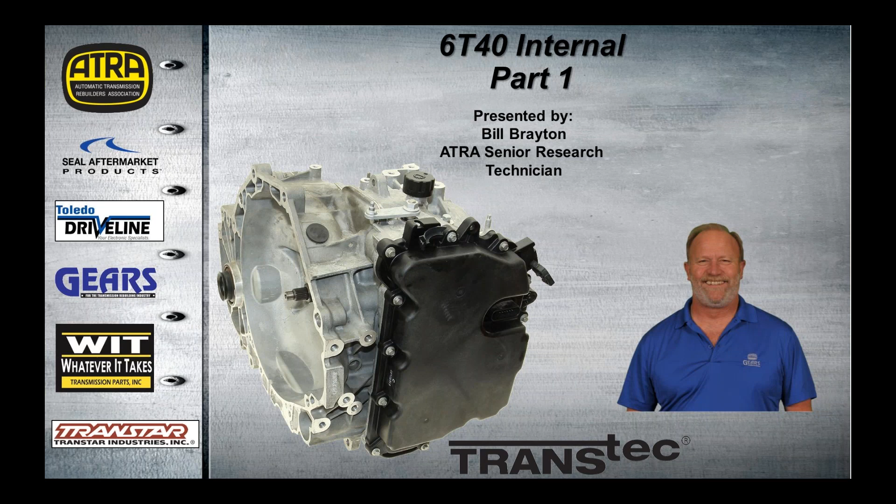I'm the ATRA Senior Research Technician, your host today for our 6T40 internal, part one of a two-part series. I started this webinar to be a full-on internal, take me apart, put me back together type of session, and that was going to be too long, so we had to split it into two parts.

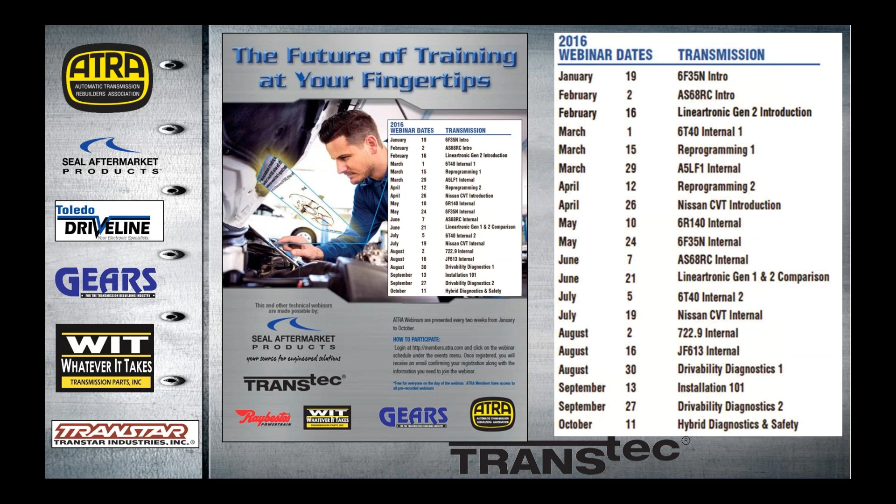July 5th is going to be part 2 of this two-part series, where we'll cover assembly and common failures for you guys to look out for. Lots of opportunities to get trained.

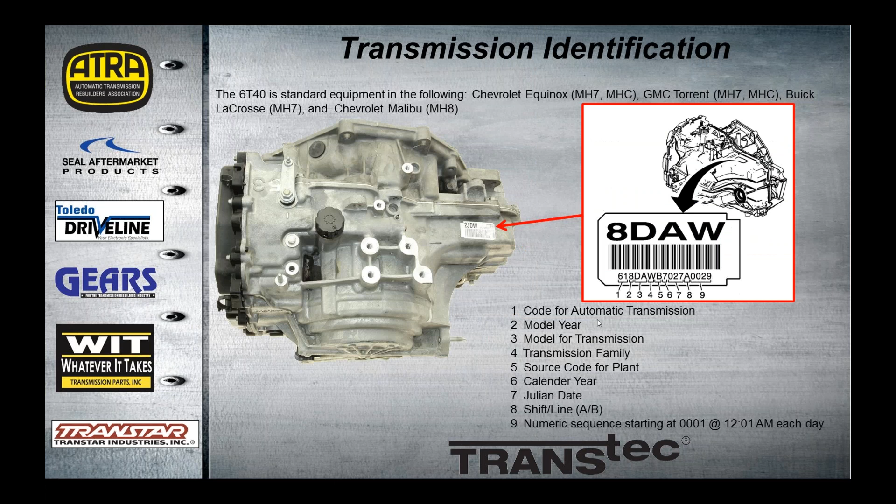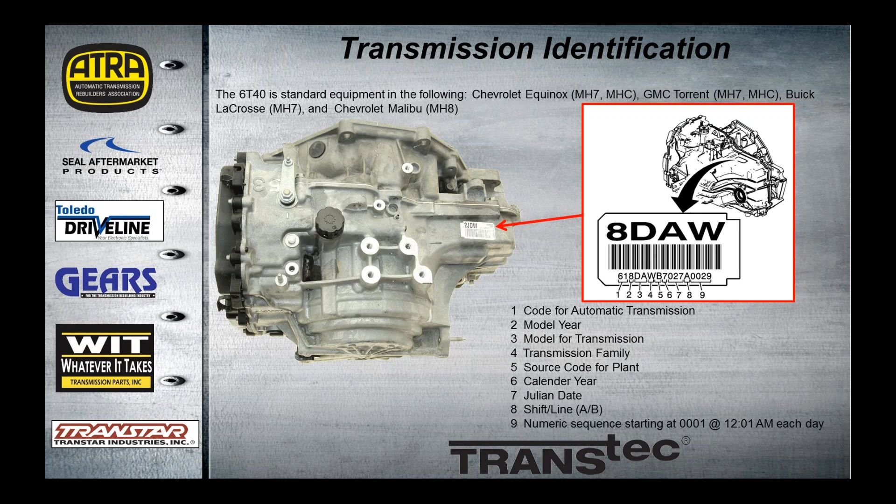Okay, let's get started here with the 6T40 identification. Here's a tag and all its explanations, so we know what goes where. We know that the first letter here is the year, so this picture right here on the right would be an 08, a very early model. On the unit on the left, you can see it's a two. So this is a 2012 unit, and this is going to be a generation 2 unit, which I will be talking about throughout the presentation.

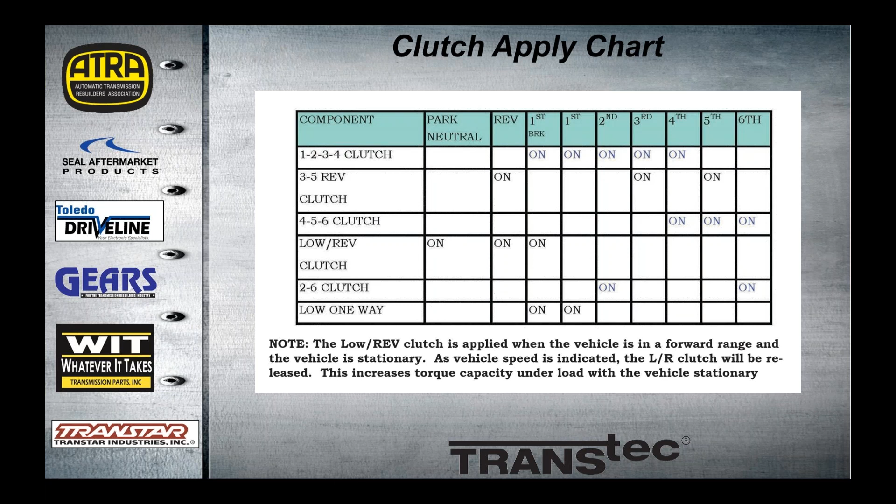And also what there is to know is that this applies for the 6F series from Ford, since this was a collaborative transmission between GM and Ford, except for the fact that the 6F35 calls the 1-2-3-4 clutch the forward clutch, and the 2-6 clutch, for example, is the intermediate clutch. So they give a different notation to the names of the clutches, and through both sets of 6-speed front-wheel drives, they all work and apply chart identically the same.

The key differences between the 6T40 and the 6T45: the 6T45 has the 1.25" wide chain and gears versus the 6T40, which is only a 1-inch setup. The 6T45 has 5 pinion planets, where the 6T40 only has 4. And the 6T45 is slightly larger and has a heavier rib case for more torque capacity.

There's just a few parts that will interchange with these units, not many at all. Sealing rings come to mind. That's about it, and you'll be seeing that here in a minute. And as I said, all these 6-speeds, whether it's Ford or GM, they all work exactly the same. The apply chart's exactly the same for all of them. So we'll get used to it, and you'll know it, no problem at all.

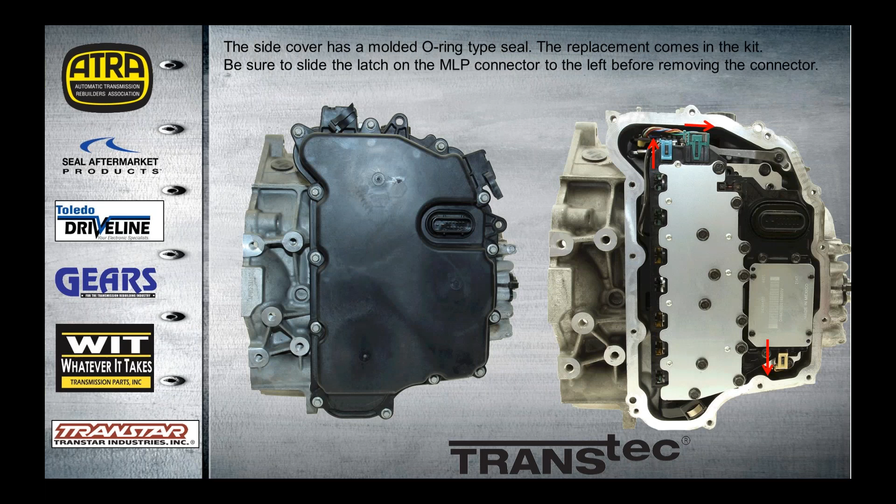The major difference between the GM and the Ford units, of course, is the computer is internal on the GM, where it's external on the Ford. So let's take a look at the inside of this unit. We've got a plastic side cover with a molded O-ring, which we can toss because the new one comes in the kit. And of course, we are going to remove the TECM.

Actually, we're going to remove the TCM first. Technically, the TECM is the valve body and the computer all in one unit. So we're going to take the TCM off first to get this apart. Of course, we're going to unplug the speed sensors and the MLP prior to removing the unit. We got 15 bolts here that we're going to remove, various sizes. And now you can see we've got the TECM on the right separated, the TCM and the solenoid separated from the valve body.

And here's one of the first telltales of the Gen 2 series. The Gen 2, by the way, started in 2012. As I said prior, these units first came out in the 2008 Malibu. This particular unit that we're looking at right now is a 2012 Malibu with a 2.4 liter.

And one of the telltales here is you can see on our solenoid filter plate, we've only got 3 passages with filter plates. On the Gen 1 series filter plates, all of these passages, except these angled passages where the pressure switch goes, have solenoid screens in them. So you know you have a Gen 2 when you've got only 3 screens here in the middle. And this could be discarded because the filter plate comes in the kit.

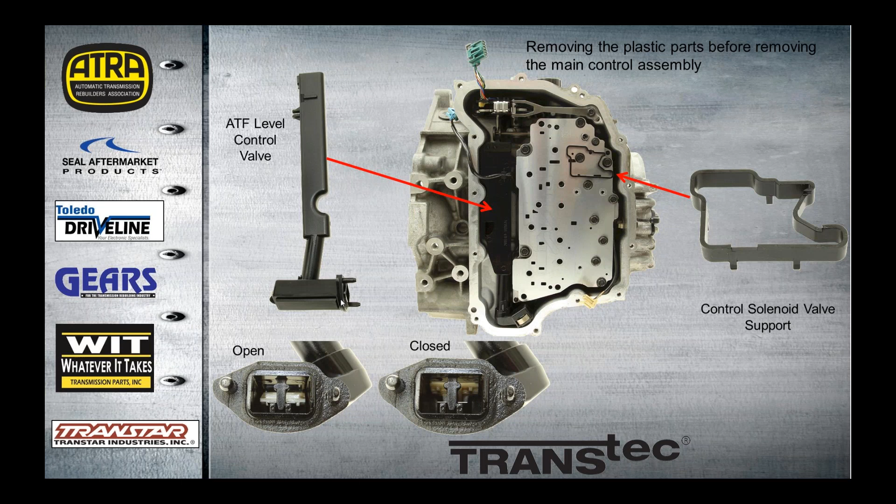And on the left, the element has warmed up, and now the flapper's open to equalize the fluid within the unit. Okay, this becomes a huge point, and so I'd like to have a word with you about fluid level checking on this unit and why it's so critical.

Today's fluid has to be checked. It's a synthetic Dex 6 that has to be checked at a certain temperature because of its expansion and contraction, at how much it expands at a certain temperature. Okay, as I said, this is pulled from the 2012 Chevy Malibu factory manual for a 2.4 liter. And we're going to check the level and the condition.

And if you call in and ask me what fluid this takes, I'm going to tell you it takes Dex 6. That's all it takes. If you want to play around with a different fluid, you choose to do so at your own peril. Because if you ask us what fluid it takes and what can you put in it, we will always tell you Dex 6.

All right, first of all, to get it started, we want to make sure there's enough fluid to safely run the vehicle. With this thing at room temperature, the fluid should just run out of the inspection port, which I'll show you here in a minute. Okay, now that's all said and done, we're going to start it up, put the manual lever through its ranges, and then back up into park, and we're going to let it sit for about 3 minutes at idle to give the fluid time to stabilize and have any foaming dissipate.

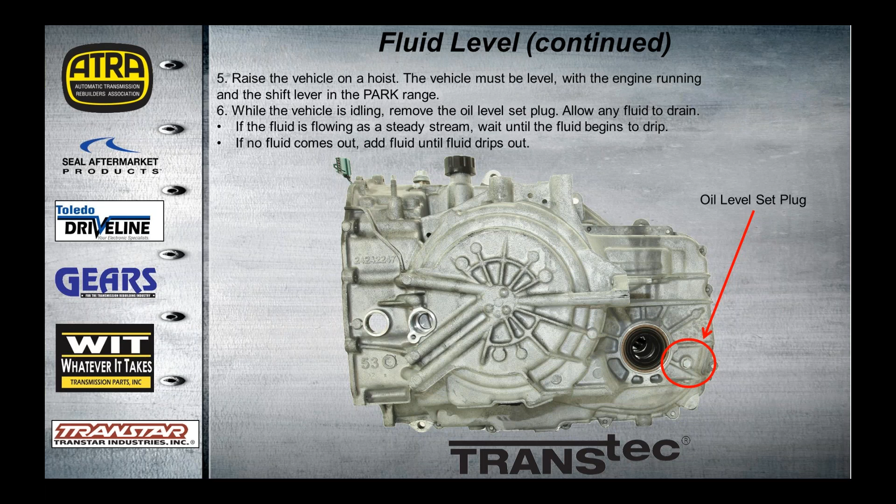So the moral of the story here is, this isn't a pull the stick, wipe the stick, put the stick back in, and check the fluid type of situation. We've got to follow these instructions to the letter, or we're either going to overfill it and burn it up, or underfill it and burn it up. It just has to be done in such a way that it's correct.

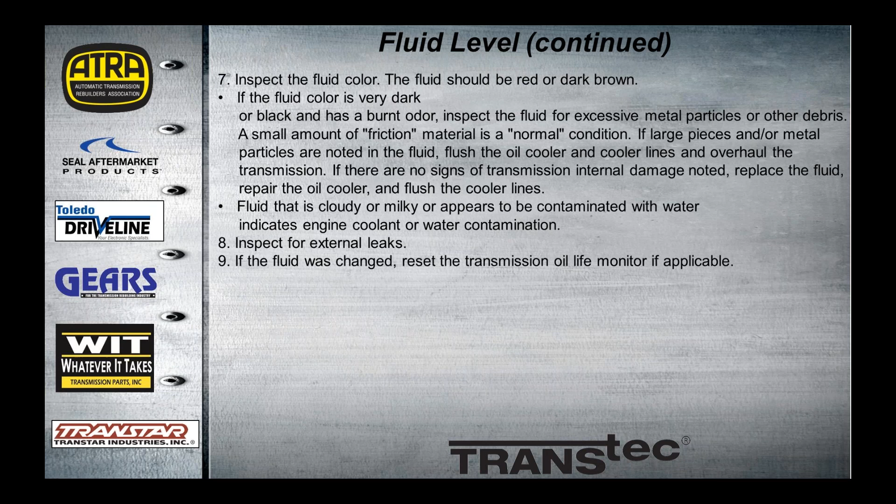And of course, when we're checking the level, we're also checking the condition. Red or dark brown, pretty normal. Obviously, if it's black or burnt and stinking up the shop, we've got a situation there. And cloudy or milky is an indication that the engine cooling system needs to be inspected carefully. And then lastly, if applicable, reset the transmission oil life monitor with your capable scan tool.

All right, let's keep going here. We're going to take the valve body off. This has one bolt that comes in from the other side that holds the halves together, so you don't have to worry about the halves falling apart.

And it will contact, and it won't break the switch. It'll contact the rooster comb, and it'll click, click, click through the gears like it's supposed to. But what will happen is the MLP readings will be off, and you'll run into engagement issues. So be very careful when installing that it's indexed into the switch correctly.

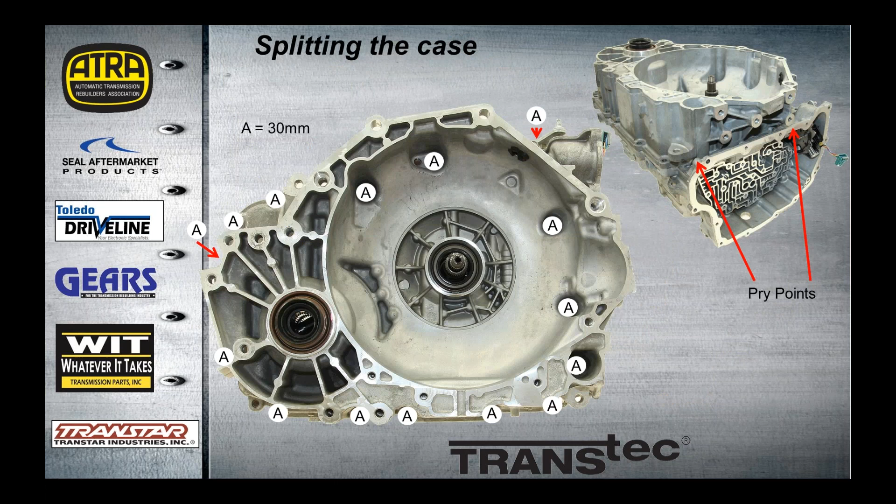So we're going to split the case. Unlike its Ford counterpart, this case and the bell housing has a gasket, whereas the 6F35 has a liquid silicone type sealing compound, which makes it very, very difficult to split the cases. That's why we point out the pry points right here for you, so we can split these cases.

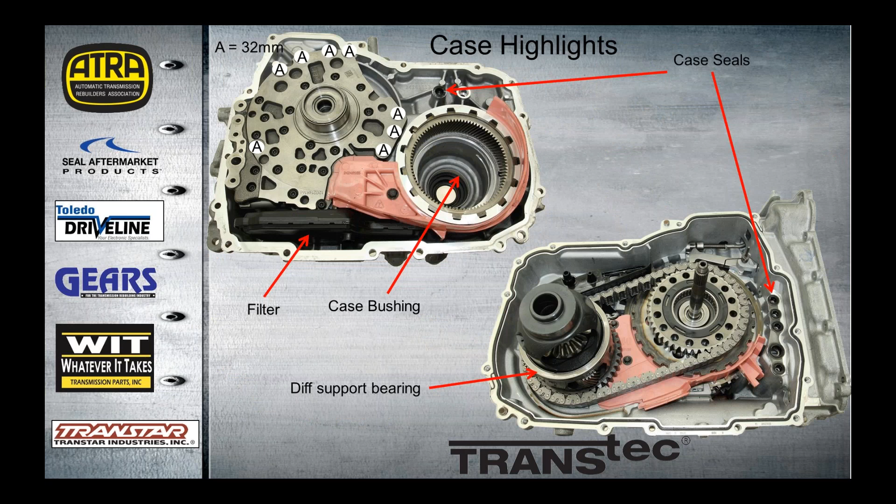So here we have the bell housing off. To show you a few highlights here, we've got some case seals that are renewed when we go back together. This seal right here seals the chain oil scoop / snubber, which I'll show you here in just a minute. Notice that they've got another hole here. It's actually got 2 alignment dowels or holes in the filter snubber that go right here.

This plastic piece, we've seen the oil baffle here. Excuse me. And the pink side, both of these, when the transmissions are overfilled, the units will get so hot that it will melt these 2 pieces of plastic and even melt the filter.

So another difference between the 6F35 and the 6T40 is the 6T40 has the support bearing on the outside of the diff, whereas the 6F has it in this area right here. And notice this bushing surface, this journal right here, there's a very large bushing here that this is going to ride on, and it's going to be very critical when it comes to axle seal support, so inspect that very carefully.

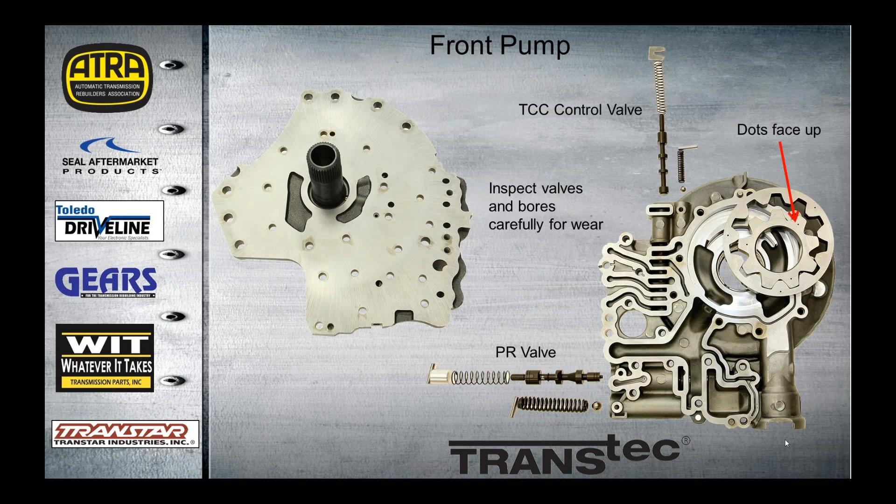Very critical that you take the time, pull these valves out, and inspect for wear. If there's any scratching whatsoever, any stickiness in this valve area, the body's going to have to be replaced. Do not use any abrasive on these Teflon coated aluminum valves. I believe there is an aftermarket oversized valve available when you start to see some wear in this unit, in this area right here.

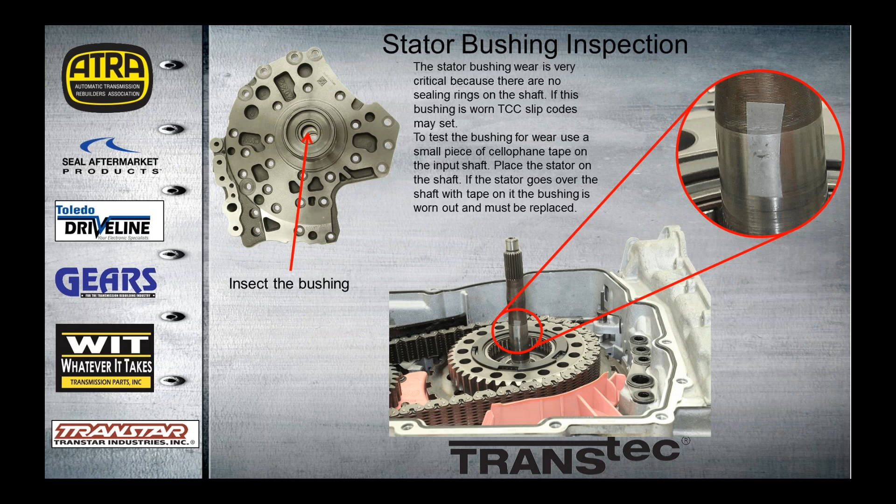Okay, there are no sealing rings on the input shaft. There's a seal here that's replaceable, comes in the kit, but the important part is the bushings that ride on the shaft, because if you have worn bushings on this stator, you're going to run a real high risk of having TCC slip codes.

So how we're going to test the bushing for wear is the cellophane tape method. We borrowed this method from checking Honda tubes and Honda bushings and the Honda shafts. We use the same type of method here. What we're going to do is put an 1/8-inch wide piece of tape up and down on the input shaft. We don't want to wrap the tape around because that's too thick. So a small piece of tape, as you see here. The tape is about 1.5 thousandths thick.

So when we take the stator and slide it down, a proper bushing should jam to a stop. Unless you force it down, it would scrape the tape off of this journal. On the other hand, if you flip the stator over and it goes down over the tape, the bushings are worn and it will definitely need to get replaced with new bushings. Easy way to check the bushings.

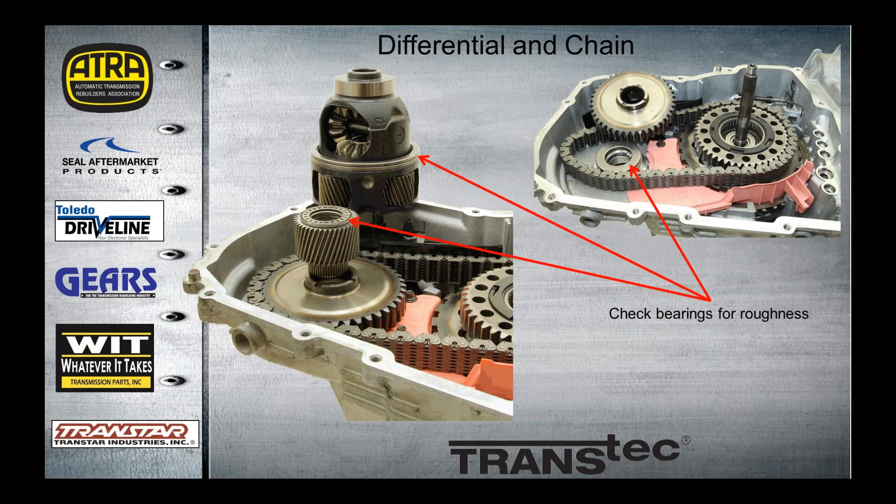Okay, the differential and chain. Obviously, it lifts right up and out of there. You want to check these bearings for roughness. Make sure they're nice and clean, ready to go back together. If there's any roughness in them, they obviously got to be replaced.

Our case parts, just a bearing on top of the drive shell. The other baffle has to come out before we lift the guts up out of the case, and of course the park pawl needs to come out as well. You can see the park gear on our output chain drive gear. Okay, we got those extra parts out of the way.

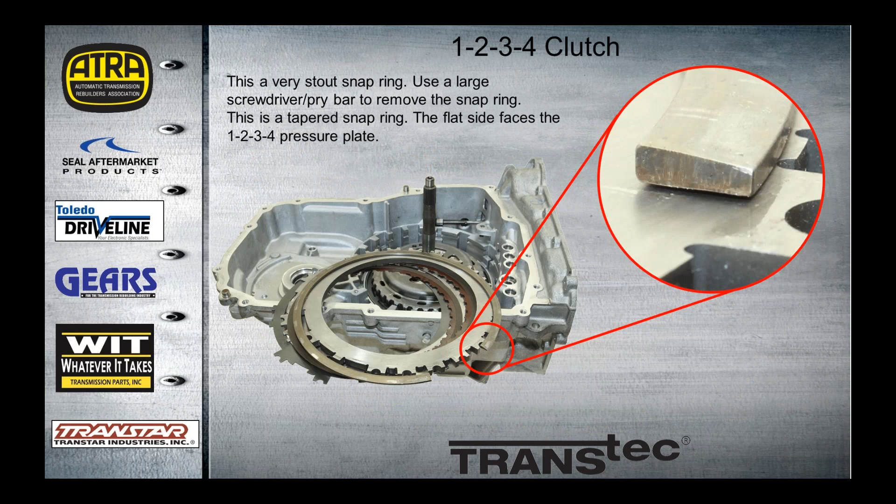Now this is a pretty stout snap ring that we're looking at here, so it's going to take a fairly large pry bar to get it out. This holds pretty much all the guts down into the case, and the clutch piston housing as well. It's not a center support, it's a clutch piston housing, which you'll see here in a little bit. It captures the 1-2-3-4 clutch assembly, and the flat side of the snap ring goes against the pressure plate. A pretty good picture on your right there, close up of the snap ring properly installed.

Okay, and the thing about the 1-2-3-4 clutch, or the forward clutch here, for me, is that so many times we think of forward clutches as drums with input shafts connected to them, that when the forward clutch applies, it's applied in all forward ranges and drives the gear train. Not anymore with the 6-speed series. The forward clutch is actually now splined to the case and is on in the forward ranges, except 5th and 6th gear. That's all right. So I'm old school.

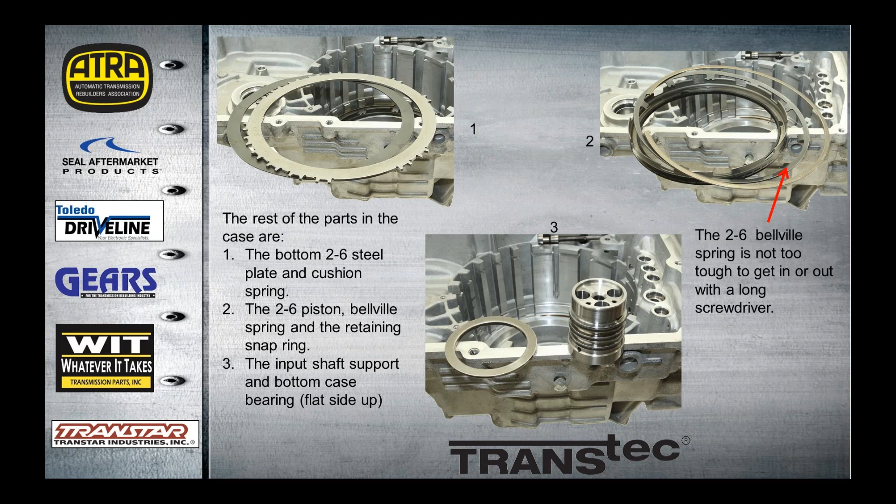Here we have the rest of the parts that are in the case. The steel, the 2-6 steel and cushion plate. Also on the right, we've got the piston, the 2-6 piston, and the return spring and its retaining snap ring. And this snap ring is not a big deal. This Belleville return spring is kind of a softie, so it's quite easy to use a couple of screwdrivers to work that snap ring down into the case.

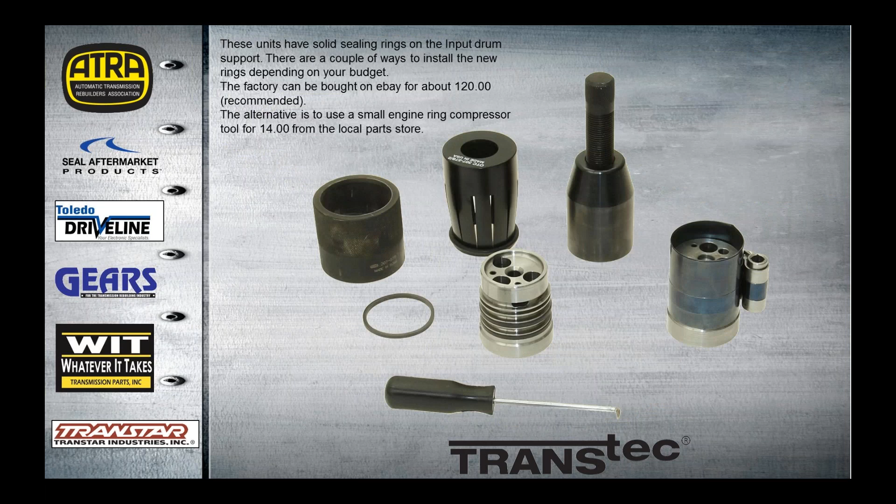And then lastly, we've got the input shaft support and the input bearing down in the case to come up, and that empties out the case. Now, I'm going to talk about the sealing rings on this input shaft support, because it's so important to renew the rings when we're going through the unit. Of course, they're easy enough to break apart and take them off and throw them in the garbage. Well, getting them back on and getting them fitted can be a bit of a challenge. There's a couple of different methods.

The factory tool, which is in the back, 3 pieces on the back, is available. I bought this setup on eBay for about 120 bucks. You can get those on the internet. It's difficult to read the part number on that because it's upside down. The part number is an OTC number 307-578/2. Okay, that's the factory tool, and I'm going to give that to you one more time. That's OTC number 307-578/2. These, you can find them on the internet.

And the thing that I like about these tools, besides how easy they are to use, is that these will work on all the six-speed front-wheel drives: 6T40, 45, 6T70, 6F35, and 6F50N. It'll work. This is one of the parts in all the series that's the same no matter what, those sealing rings. The supports are different. So you can get that for 120 bucks, or the alternative is to use a small engine ring compressing tool, and it can be just as effective.

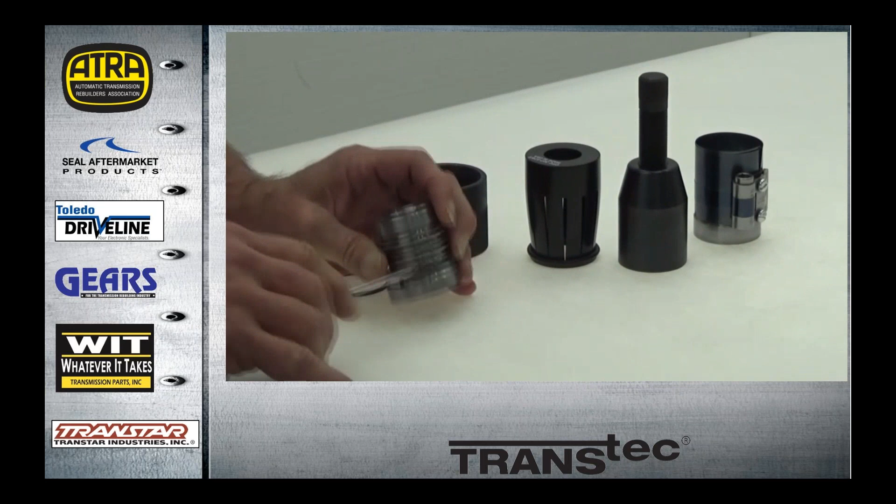Let's see here. I've got a short video demonstrating how these tools work. Okay, here we have the input shaft support for the 6T40E, and we're going to install new sealing rings on these. These are solid sealing rings, so there's a couple different methods. You can use the scribe to snap the sealing ring down on in here, and then we can use a small piston ring compressor that we got at our parts store. That device is effective. It costs about 14 bucks. It's a cheap method to put the rings on there and size them down.

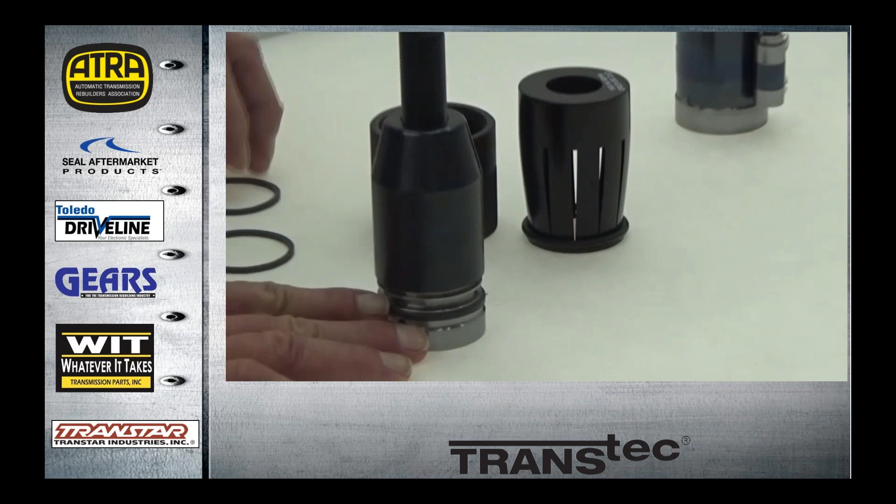The other way to do it is to go out and get the factory tool here, part number 307-578-2, and this was bought on eBay for about 120 bucks. It's a really nice tool. Let's take a look at how that works. This is our sizer tool, and you can see we've got it adjusted right to the next ring to be installed. So we're going to take the ring and put it on our tool here. Now this is pretty cool the way this thing works. It's fitted just so that it goes down to the next ring groove, so we just push it straight on down and it snaps into place.

Now we've got our sealing rings on. Boy, these things are pretty distorted. So we're going to use the sizing tool. We're going to carefully put the ring into the tool, because it takes a little bit of work, because the ring is so distorted that it'll pop out of the groove. So we might have to help it into the groove a little bit. Like I said, that ring really gets distorted.

We go through the process here. So we work it down in there. Now it's ready to be used. Let's push it back out here. We've got it all the way down. You can even set this aside while you're building other components. Now we press that back out of there. You can see our rings are in good shape and ready to be installed into the unit.

Okay, so there are two different methods to put the sealing rings in. If you buy the factory tool, it's something that you're gonna be using quite a bit, because they are building millions of these units. We're gonna see a ton of these things. All right, let's check out the gear train.

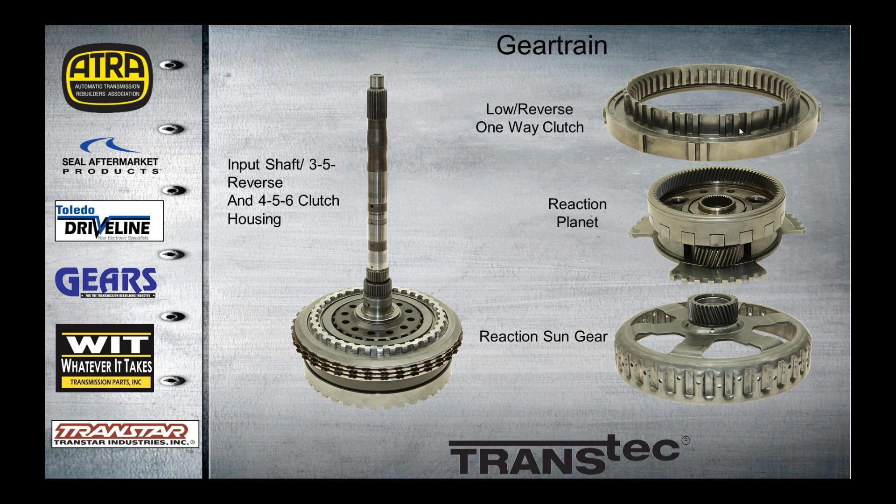Our 3-5 reverse and our 4-5-6 housing, input shaft and housing. The reaction sun gear goes over the 3-5 reverse clutches, splines into the reaction planet that goes on top of that. Then we have our low and reverse one-way sprag. This is a ratchet type sprag. It does not come apart. I don't think we're going to see these failing much. They look like they're pretty bulletproof. But then again, never say never, right?

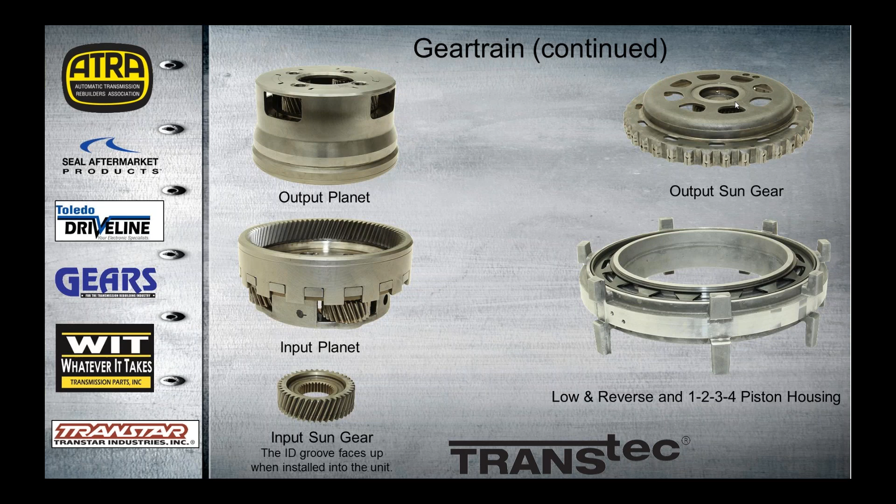Down to the sun gear, which is splined to the input shaft. The ID groove on the inside of the gear right here faces up always. Then we have the input planet, the output planet, and now we have our, I called it a center support at one time, and really it supports nothing except the piston housing. So it's a piston housing. And then finally, the output sun gear.

So let's take apart the input shaft and the 3-5 reverse 4-5-6 housing. Well, to do that, underneath in the sealing ring bore, we've got to go in there and remove this small snap ring to remove the shaft and the clutch hub. The clutch hub is captured by the shaft. It won't come out independently because of the splines right here. That's where the sun gear splines to, by the way.

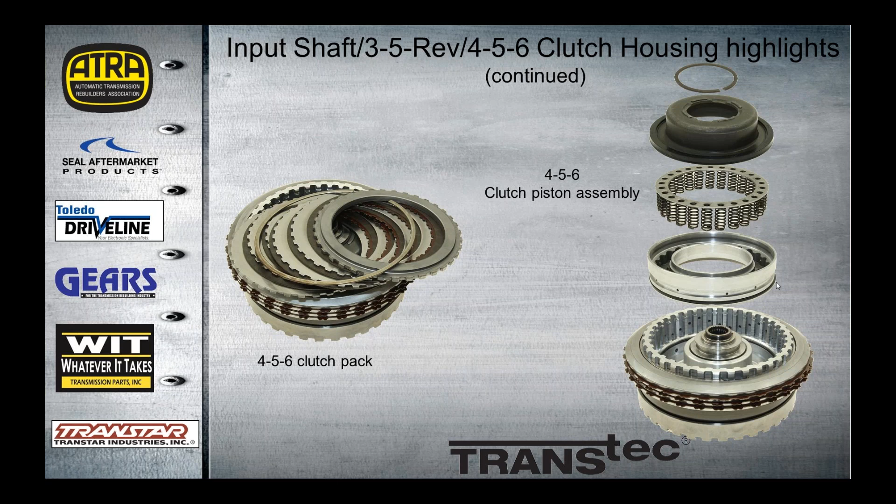Okay, it's pretty straightforward removing the 4-5-6 clutch pack and the piston assembly. It's an aluminum piston with seals down in the drum here and on the piston. Then we have a balance piston that holds compensator oil or balance oil so that we don't get a centrifugal apply.

And to get the 3-5 reverse piston housing apart, we have to flip the drum over and press the housing down to expose the captured snap ring here. But be very careful here, you don't want to press this down too far. It's just enough till this tab meets the aluminum here, because if you get any heavier on that, it will crack the housing, and it's time to buy a new drum, because I don't think these housings are available in the aftermarket or from the dealer.

We've got a molded piston here that we should replace every time, and here we can see the two apply areas. This area of the drum is the compensator oil, or balance oil. Thank you. Balance oil, that was what I was trying to think of. And here is the apply oil right here, which seals on the drum to apply the 3-5 reverse clutches.